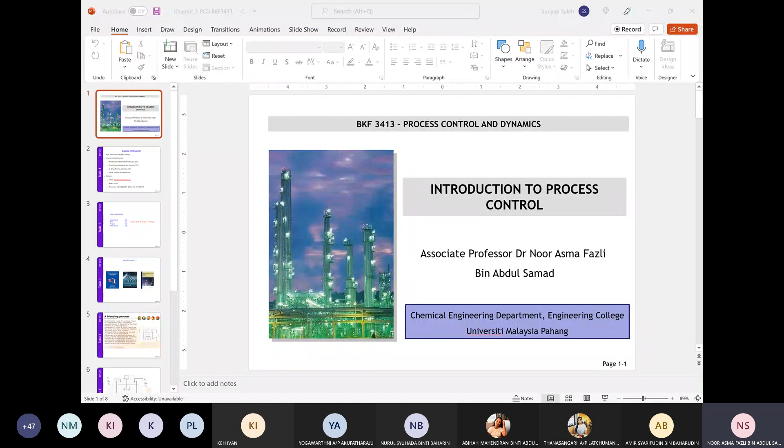My name is Noor Asma Fazli bin Abdul Samad, and I will serve as your instructor for this class. A little bit of academic qualification from me: I got my degree and master's in chemical engineering from UTM, Johor, and then I pursued my study in the process modeling and control area at Denmark Technical University, DTU. Lastly, I also extended my study in the postdoctoral area around properties prediction.

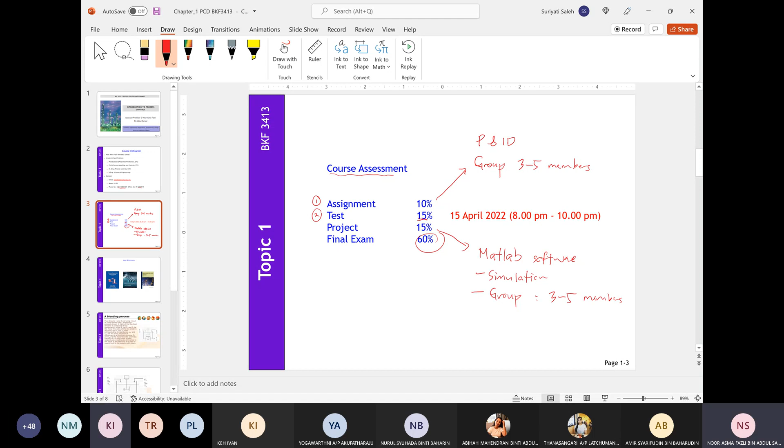Okay, if there is no question, then we go for the textbook, the main reference that will be used for this subject. You are free to use any kind of textbook, however the main thing that we will refer to is based on this textbook, which is Process Dynamics and Control. There are so many versions - the first one is the second edition textbook, which is one of the textbooks you can use. This one, normally for the second edition, is a complete version. That means when we say complete, it covers everything - all of the content that is covered in this subject will be available in this textbook.

And the good thing about the second edition is it's supported with explanation. That means any kind of exercise, any kind of material is supported with theoretical discussion. So this second edition, for me, is a good textbook for all of you.

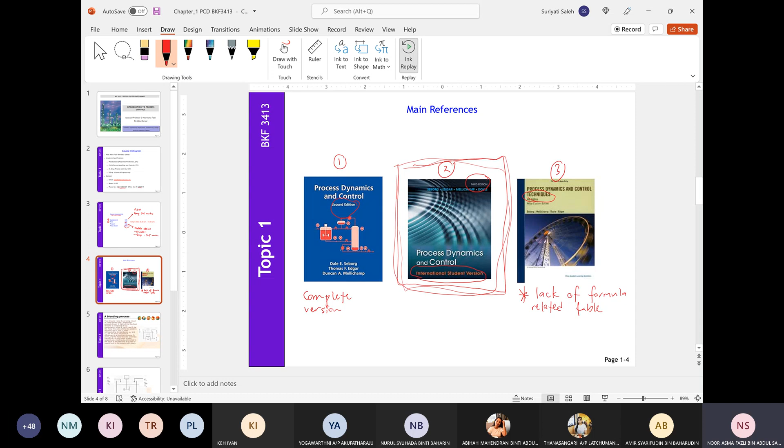Okay. So before I begin our class, let's hear some opinions from all of you regarding this subject. Any opinion or input from any of you regarding this subject? What do you hear from your seniors, or what is your past experience about this subject?

Doctor, yes, may I ask a question? Is the textbook compulsory for us to buy?

Okay, since this semester we are still conducting online mode, you don't need to buy it. As long as you have the soft copy, that is enough. It's compulsory to have the soft copy. If you have the hard copy textbook, it will be easier for you to study, but it's not compulsory to buy the textbook.

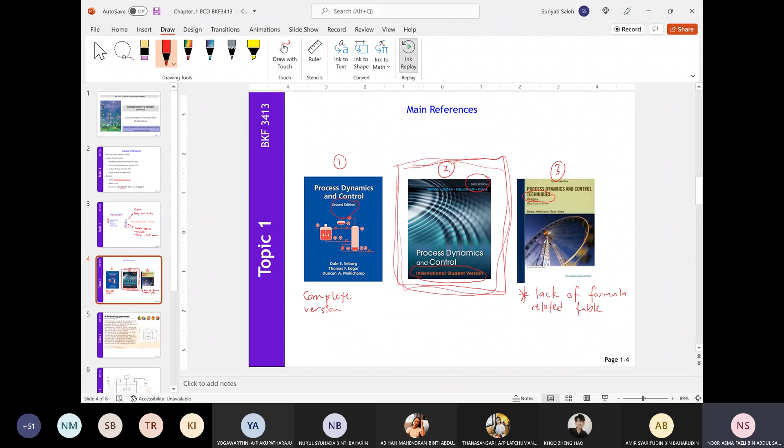Okay, let's take a look at the topic of introduction. This is the textbook, second edition. Now let's go to the introduction. We go straight to the case study, so we won't dwell on the introduction too much. Let's see - in this case, a blending process.

So here you have the term blending. What is meant by blending? Blending is what we call mixing, meaning you have two components you want to mix into a single component, or you want to achieve a uniform composition.

For this part, two streams, 1 and 2. So you have two streams coming into the system. Stream 1 and 2 are being mixed in a well-stirred tank, producing a product stream 3. So this is your stream number 1, stream number 2. You add them together and then you have the stirrer. So this is your stirrer.

The function of the stirrer in this case is to ensure good mixing of the composition, meaning that when you mix it, you will achieve a uniform composition. Once the stirring process is complete and you achieve uniformity, the product exits the process at stream number 3. So based on this, you have 2 inlets and 1 outlet.

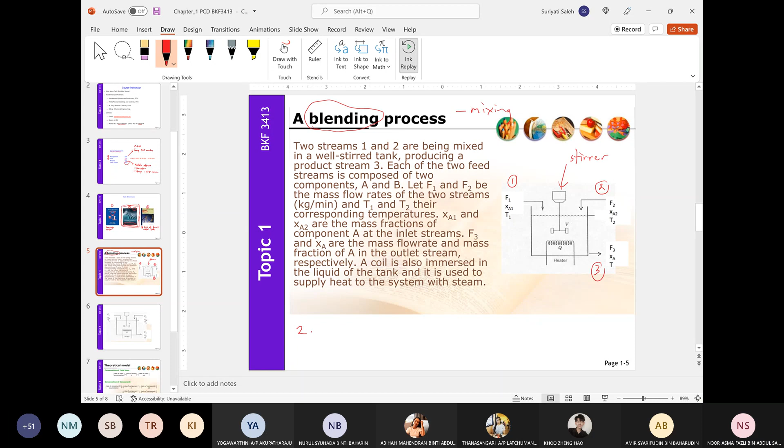Okay, each of the 2 feed streams is composed of 2 components, A and B. So in stream number 1, you have A and B, and stream number 2 also has A and B.

Let F1 and F2 be the mass flow rates, in kilograms per minute - the unit is mass over time - and T1 and T2 their corresponding temperatures. Since you want to mix it, this needs to involve the composition. So XA1 and XA2 are the mass fractions of component A at the inlet streams, and F3 and XA are the mass flow rate and mass fraction of A in the outlet stream.

So here is the elaboration of the variables. First we have the unit operation, which in this case is the blending tank, stirred tank, or mixing tank. You put 2 flow rates coming into the system, mix it, and then achieve the composition.

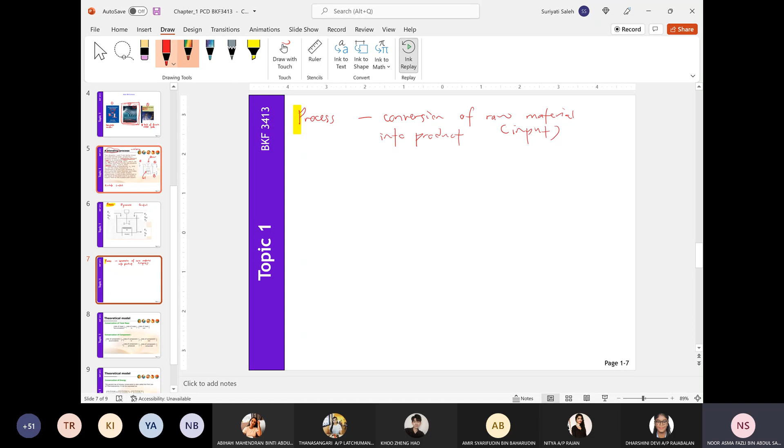And then you want to mix the solution. And by mixing the solution, you will get the desired product in the form of the composition. So that is what is meant by the process. So for this part, the process understanding is very important. Why is it important? Because it decides what variables will be involved.

So let's take a look. Here you have stream number 1, stream number 2, and stream number 3. We have F1, which stands for the mass flow rate, and F2 is also the mass flow rate. You have the mass flow rate coming into the system, entering the system. So when you have the mass coming into the system, it will change your volume inside the tank. The V here stands for the volume.

Just to imagine, let's say we have a mass flow rate here of 5 kilograms per minute, the second stream 3 kilograms per minute, and F3, let's say 2 kilograms per minute. You have 5 and 3 as the inlet flow rates, and you have 2. What happened to the volume? Increasing. Why is it increasing? Because the input is larger than the output.

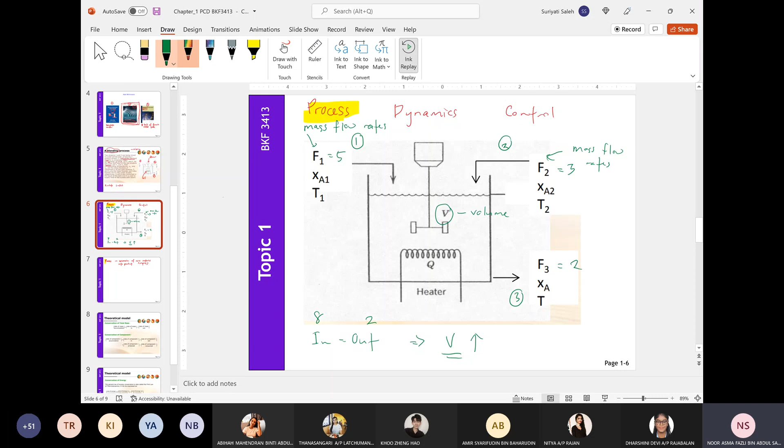How much does it increase? This will be observed through the mathematical model. So you need the mathematical equation in order to observe how the behavior of the volume changes. What I want to emphasize is that by evaluating the impact of the variable, we need to come up with the relevant mathematical model, which will give us how the behavior looks. So we can say the volume is increased, but how much it is increased can be determined through the mathematical model.

The same goes with the composition here. You have XA1, you have XA2, and in the end you have XA. Let's say, just a random value for you to imagine, XA1 here is 0.5 and XA2 is 0.9. So when we mix it, you will achieve a new composition. That means there will be a change in your composition value. So how is it changed?

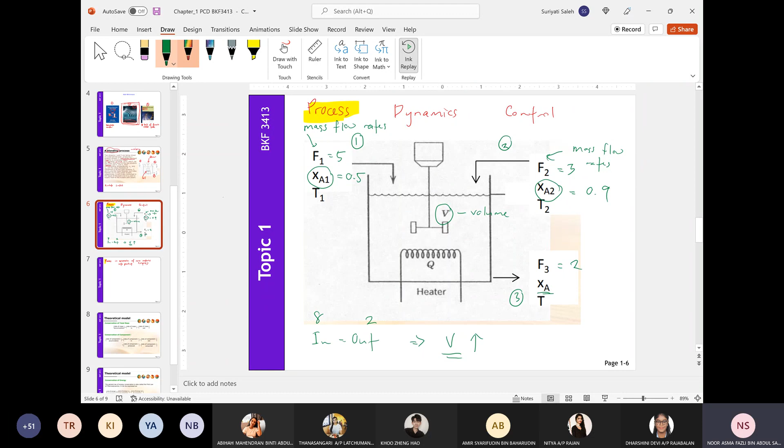It will depend, or it can be predicted using a mathematical model. The same goes with the temperature. You have the T1, you have the T2, you have the T, and then you have the Q here. Let's say here T1 at ambient temperature 25 degrees C, T2 also 25 degrees C. Then you put heat. So this heater, maybe you put it 1000 kilojoule per hour or per minute.

So you heat it, then of course the temperature will be increased from ambient to the higher temperature. But what is the value of the higher temperature? How can we determine it? By using a mathematical model. So for this case, we can see that the volume, the composition, the temperature, these variables will be changed. How to observe the change of these variables? Then you need the relevant mathematical model.

And how the mathematical model can be generated or derived is by looking at the conservation of mass and energy principle. So this is the extension from what has been learned in material and energy balance. In material and energy balance, you don't consider the rate of accumulation. For example, in the conservation of total mass, the general equation is rate of mass accumulation, how much your mass is accumulating in the system, equal to rate of mass in minus rate of mass out.

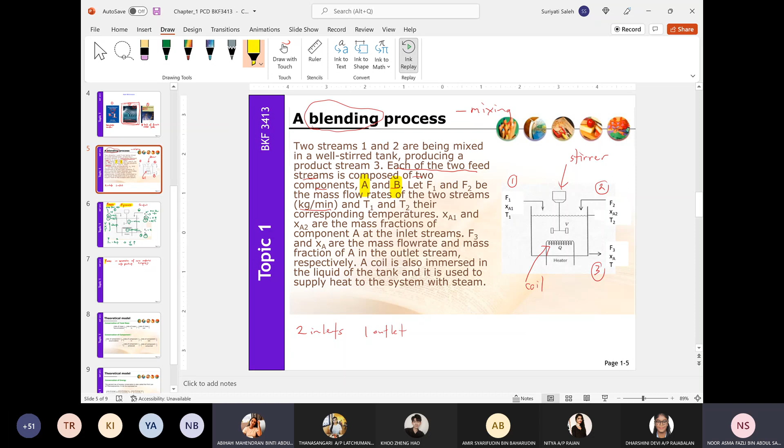So in this case, we will consider the rate of accumulation, where this one is equal to the rate of mass in minus the rate of mass out. And since you have the composition change, the mass fraction will be changed, then we also need to consider the conservation of component. For example, in the given case study, you have two components, A and B. That means we will derive the equation to represent the composition of A and the composition of B. Once we obtain the model, we can observe the behavior of change for components A and B.

So for the conservation of the component, normally we will start with the rate of component accumulation, the first term. And this accounts for the rate of component in minus rate of component out: how much of this component is entering the system minus how much is exiting the system. And some of the terms that can be included are the rate of component i produced and how much has been consumed. So in this case, you can see there are 4 different items on the right hand side: component i in, component i out, component i produced, and component i consumed.

So the selection of the terms that need to be used depends on whether your process involves a reaction or not. For this part, the blending system, you just mix the composition into one. So when you mix it, it does not involve any reaction.

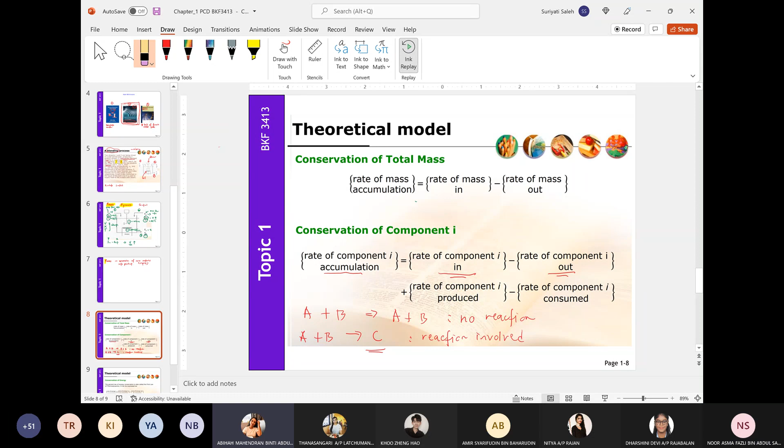And lastly, what we want to cover is the conservation of energy, where the energy is normally referring to the temperature. So the energy in this case we assume is based on the enthalpy. Normally for the energy conservation, it is developed on the principle of the first law of thermodynamics, where energy cannot be created, cannot be destroyed. However, it can be transformed from one form to another form.

So how is it transformed? In this case, we accumulate the energy based on its rate, and we account for it based on the rate of energy in by convection, out by convection. So you have the stream coming into the system, the stream exiting the system. This stream coming into the system carries some energy. This energy is brought in by convection, and exits the system also by convection. So this is contributing to the energy change in your system.

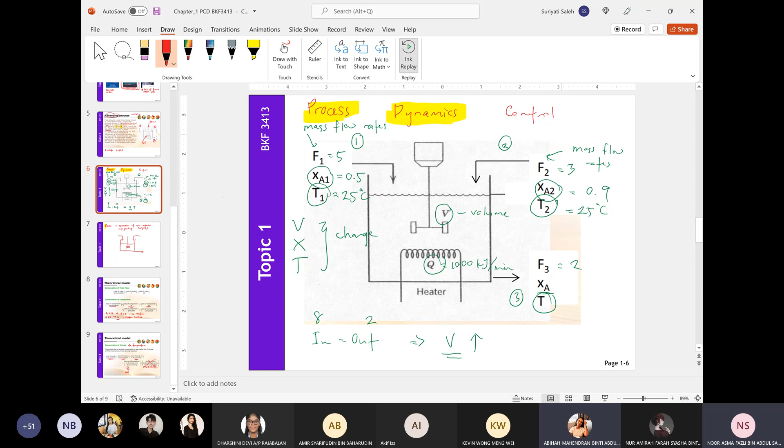Alright. For this part, it's clear. For the case study I give it to you, it's clear. The Q is there, so that means you have the heat addition. You have the coil. In some cases, when you read the question in the test or final examination, it does not mention any coil. It's like this, so no coil involved.

How about the temperature? The temperature normally depends on the value of your inlet. Let's say here you have T1 25 degrees C, T2 also 25 degrees C. Normally in this case we assume the temperature is not going to change, because here we normally neglect the heat of vaporization, the heat of formation and so on. We just assume the temperature comes from the flow rate only.

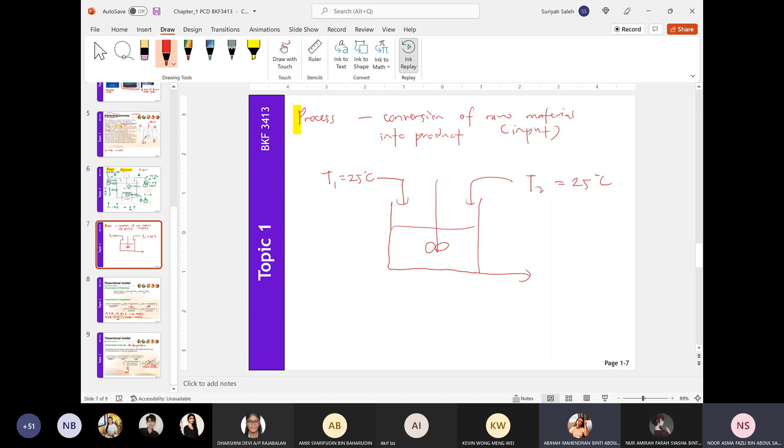So when you have inlet temperature 25 and the second inlet temperature is also 25, then we can assume the system is isothermal. When the system is isothermal, there is no temperature change. You don't need to do the energy balance.

However, let's say you have a second condition. The temperature T1 is 25 degrees C, the temperature T2 is 100 degrees C. So you have two different temperatures coming into the system. Of course, in the end you will have a temperature change. So in this case, you cannot assume it as isothermal.

If we calculate further, 25 degrees C and 100 degrees C, maybe in the end you will get around 50, 60 degrees C. So there will be a temperature change inside the tank, and you require the energy balance for this part. Although it's important to know that in this case you don't have any coil.

In other words, if you don't have the coil, you need to check your inlet temperature. Is it constant or not? If the inlet temperatures have the same value, you don't need the energy balance; you can assume it as isothermal. If the inlet temperatures are like this, 25 degrees C and 100 degrees C, then of course you will have a temperature change inside the tank. So that is the answer for your question.

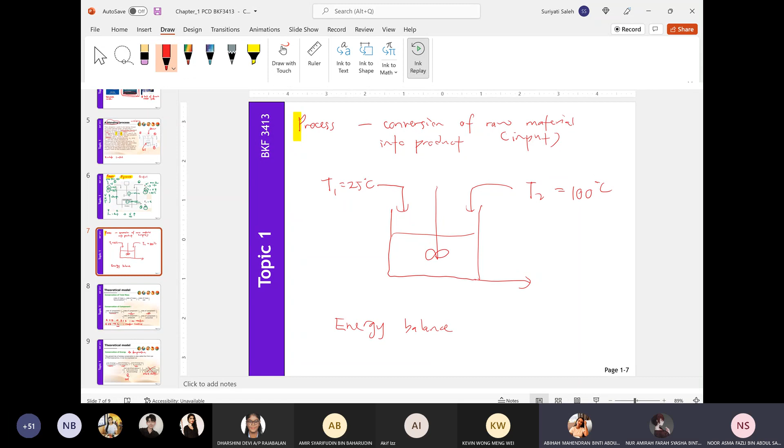The Q is coming from the coil.

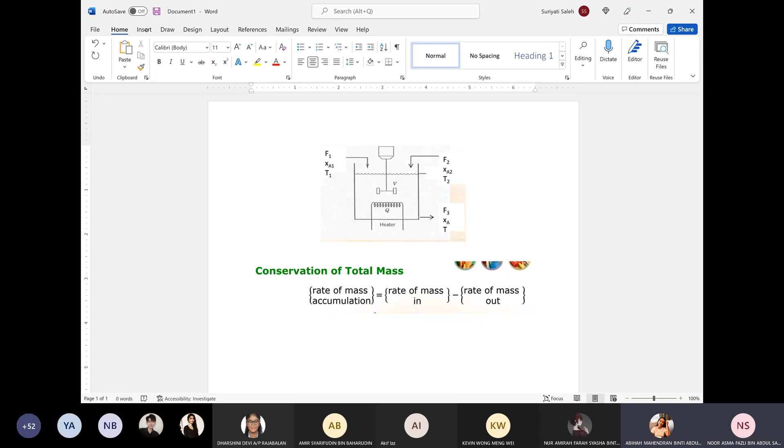Okay, let's continue with the derivation of mass principle. We will use the given case study. In this case, we have the blending system where you have two inlets coming into the system. The F is your mass flow rate, where the unit given is kilogram per minute. And the X is the mass fraction. Since you have the mass in kilograms, the mass fraction should be kilogram over kilogram. This is the standard unit.

You need to ensure you have consistent units. If the mass flow rate is in kilograms, the mass fraction needs to be kilogram over kilogram. If you have gram over gram, you need to convert it into kilogram, because the consistency of the unit is very important. Based on our observation of the process, when you have two flow rates coming into the system and one exiting, the volume inside will change, either increased or decreased, depending on the value of your mass flow rate.

Now we want to derive the relevant mathematical equation to represent the volume inside the tank. Based on the conservation of total mass, the first term is the rate of mass accumulation, dm/dt, where d is the derivative, the differential equation to account for how the mass changes against time. The m stands for the mass, in kilograms, and t is your time, in this case in minutes. So dm/dt represents the rate of mass accumulation.

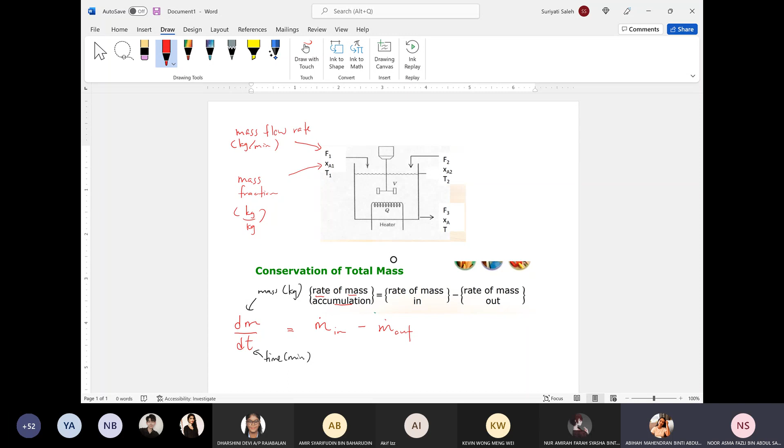And then it equals the rate of mass in, normally with the symbol M dot in, minus M dot out. M dot in is the rate of mass in, M dot out is the rate of mass out. This is the standard symbol used to represent the rate of mass in minus the rate of mass out.

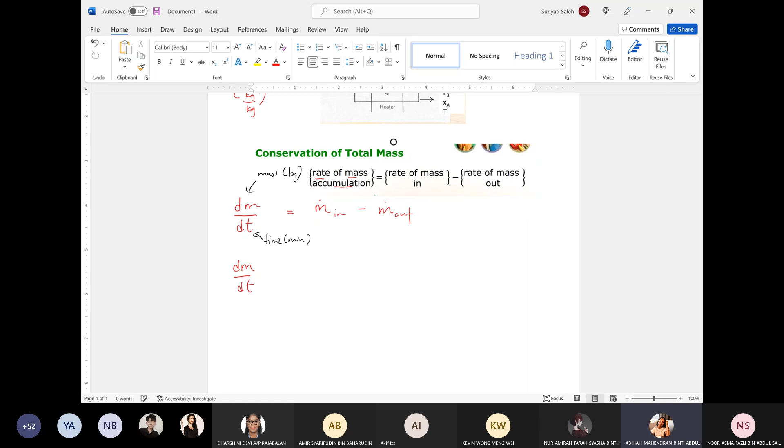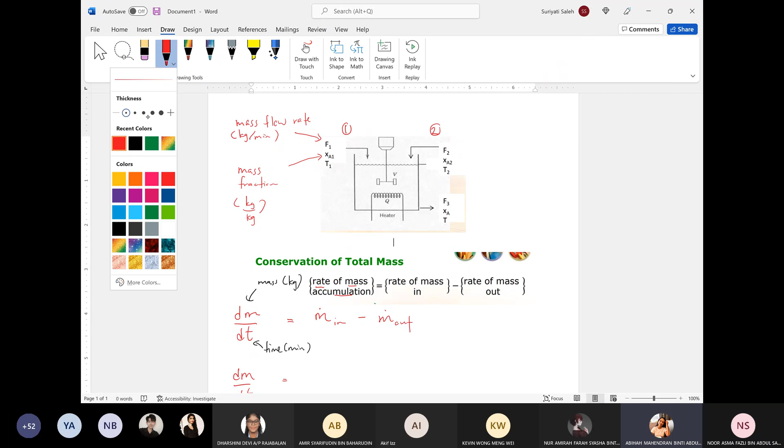So based on this, we know that dm/dt equals m in, the rate of mass coming in from stream number 1 and stream number 2. This is the mass coming into the system. Since we need to ensure the unit is consistent on the left and the right hand side, the rate of mass out must have the unit of kilogram per minute. So when you have kilogram per minute on the right hand side of the equation, it's also consistent with the unit on the left hand side of your equation.

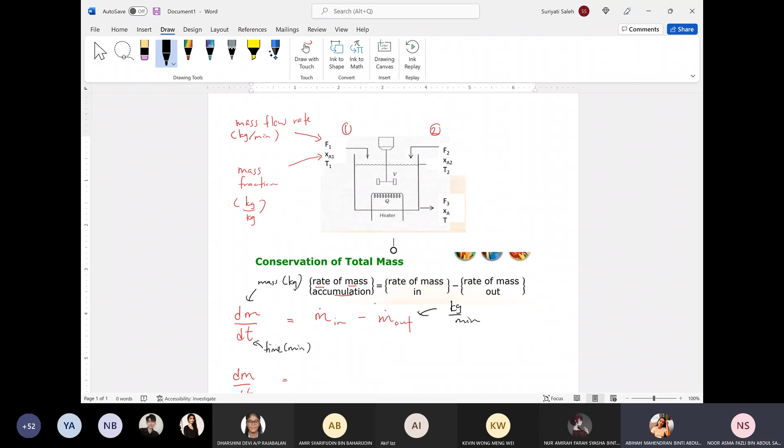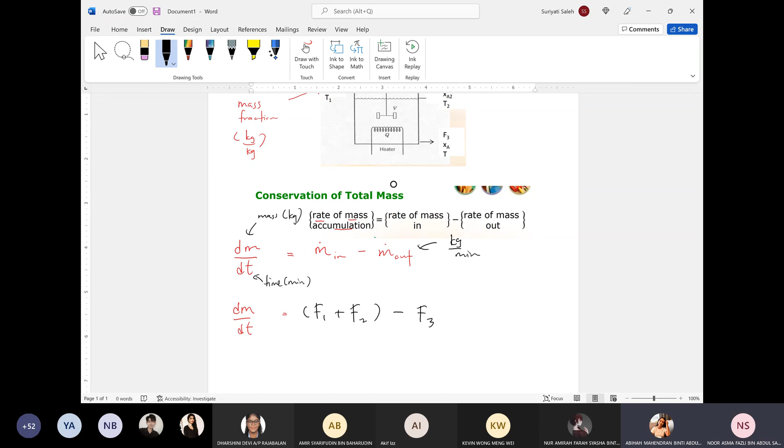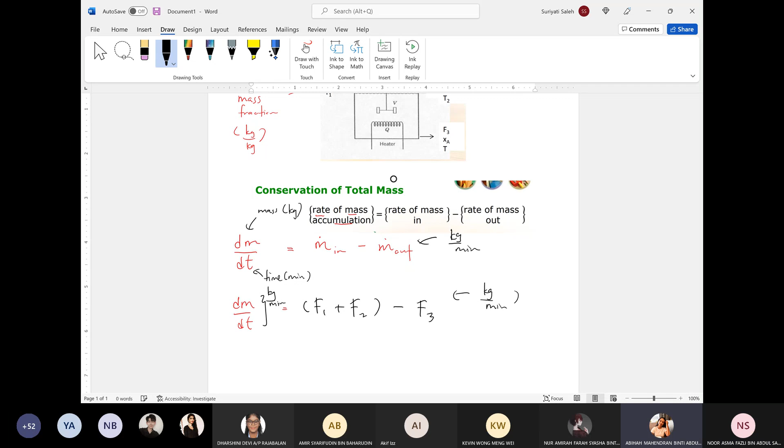So based on this, you have two flow rates coming into the system. So here you need to add F1 plus F2. This F1 plus F2 represents the rate of mass coming into the system. And then you have minus F3. F3 is the rate of mass exiting the system. So that's how you can adjust accordingly. When we check again, dm/dt has kilogram per minute, and the right hand side is also kilogram per minute. Then it is consistent. So this represents your conservation of total mass.

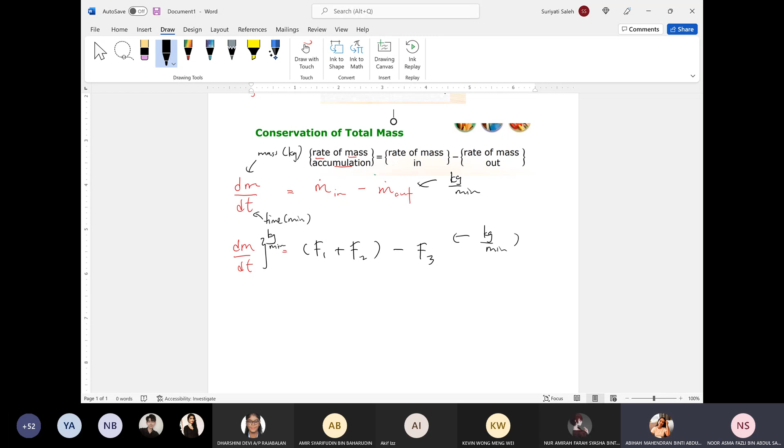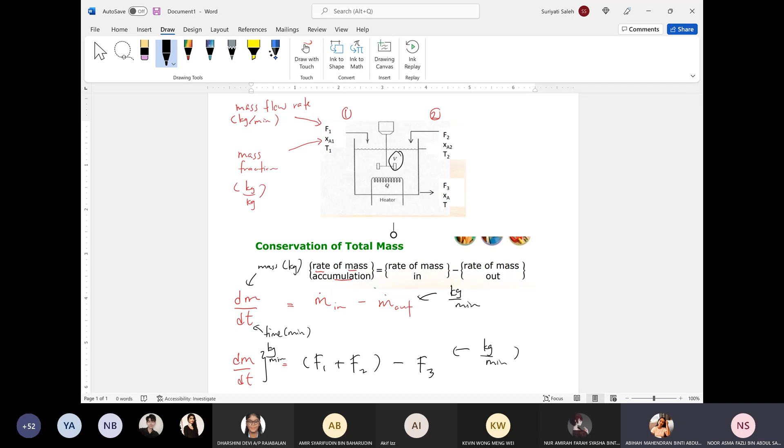The problem here is your left hand side, dm/dt, change of mass against time. If you take a look at your case study, the variable used is volume. So we need to identify the relationship between the volume and the mass. Normally we can use density to relate mass and volume, where mass m equals density multiplied by volume, where mass is kilogram, volume is meter cube, and density is kilogram per meter cube. You cancel meter cube, you get kilogram. So this relationship can be used to relate mass and volume.

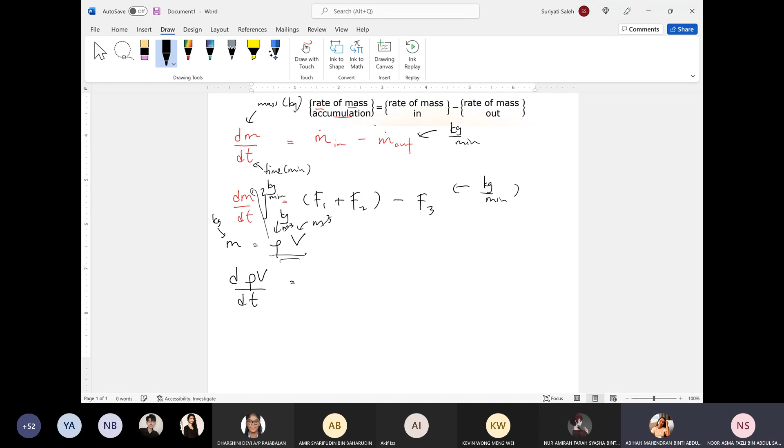What we need to do is put this relationship inside the equation. So that becomes d(rho V)/dt equal to F1 plus F2 minus F3. What happens next is to expand the equation, where d(rho V)/dt can be expanded to become rho dV/dt plus V d rho/dt, equal to F1 plus F2 minus F3. So based on the expansion of density and volume, you get two additional terms. The first one is rho dV/dt, and the second one is V d rho/dt.

So we have the density relationship. The first term, dV/dt, is volume change against time, reflecting how the volume inside the tank is changing. The second term is density against time. Normally the density is not going to change against time. It's fixed. The simple way is to imagine the density of water. Today, the density of water is 1000 kilogram per meter cube. What is tomorrow's density of water?

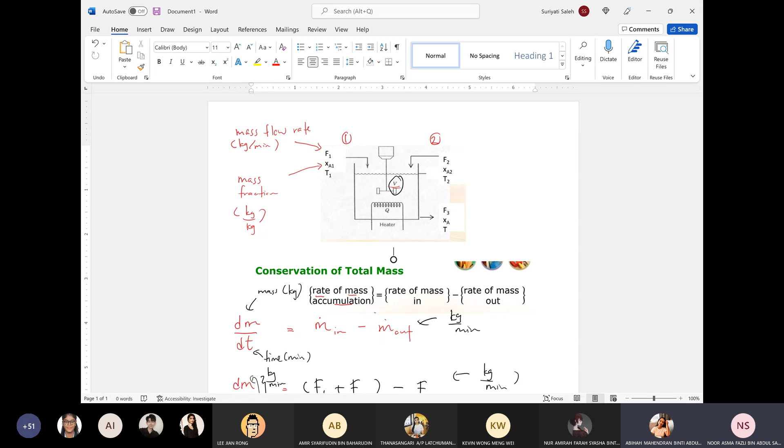So we complete the conservation of total mass, where your equation reduces to rho dV/dt equal to F1 plus F2 minus F3. This is the final overall mass balance for your given system, where now you already use the volume, the given variable for this case study. Once we complete the conservation of mass, we can focus on the conservation of component balance. This is your equation, conservation of component.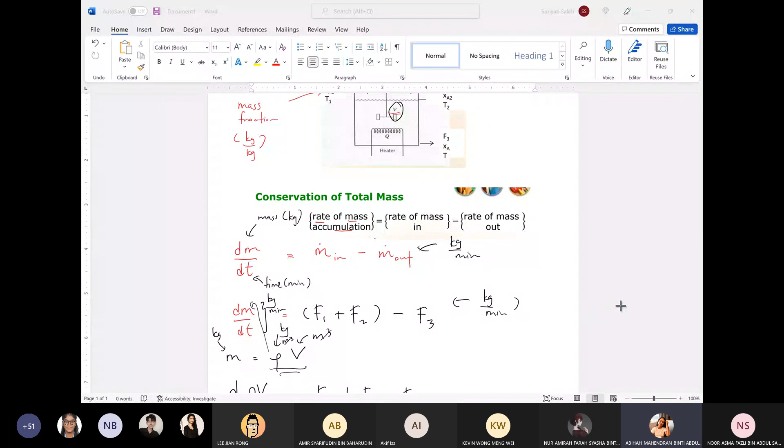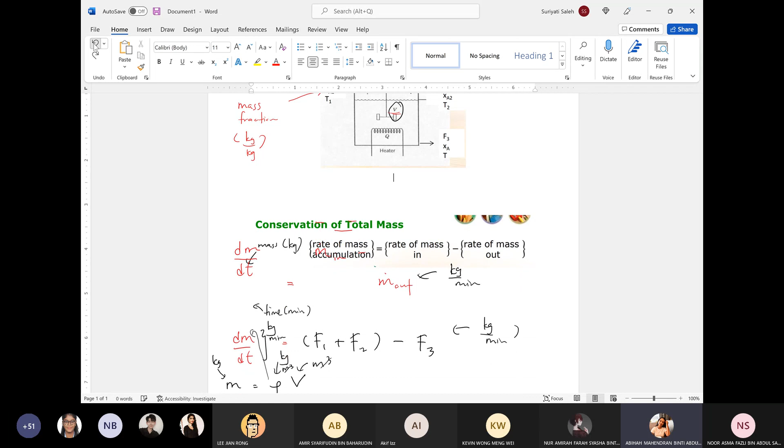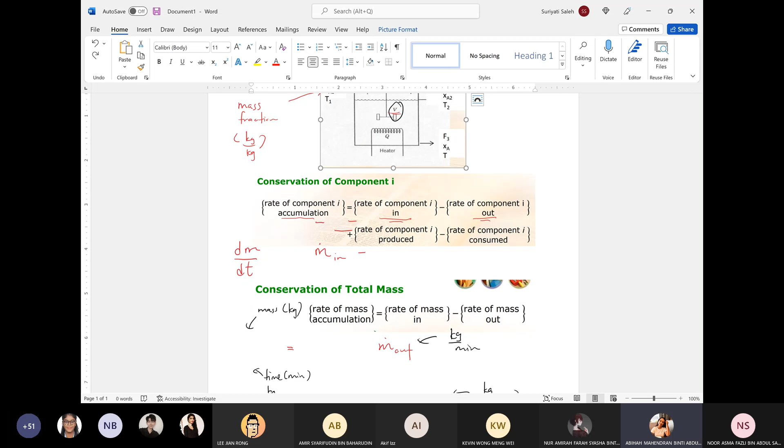Now we concentrate on this part. Doctor, your voice is lagging. Oh, my voice is lagging. Oh, wait a moment. Okay. Can you hear me? Yes, Doctor. Alright.

So in the previous case we developed the conservation of total mass. The second part is the conservation of component, because we deal with two components in this case. For this part, we concentrate on XA. As given in the problem, you have XA1, XA2, and XA here. We want to develop the component balance of A. We employ the conservation of component principle, where you have the rate of component i accumulation. Component i refers to component A.

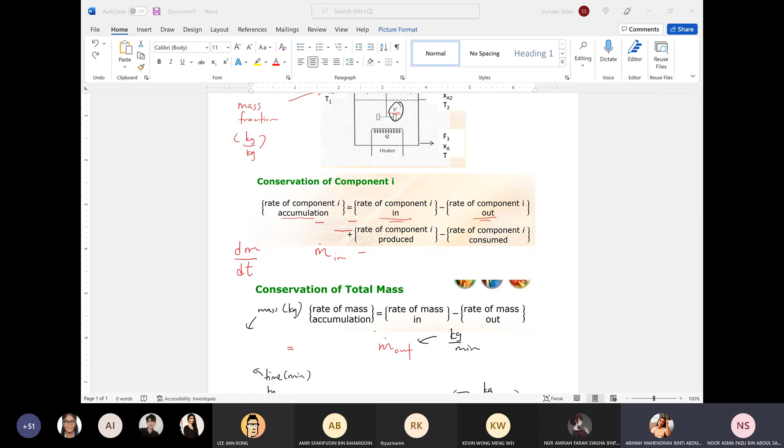All right, so for this part, we focus on the component A derivation, where we use the conservation of component I principle. The first part is the rate of component I accumulation. So for this, we focus on component A, where the rate of component I accumulation is represented by dMA over dt, where the MA here represents the mass of A.

Before this is just total mass, so for this part we specifically focus on the mass A. This means the unit for the mass of A must be kilogram A, and the dt is the time, which in this case refers to the minute.

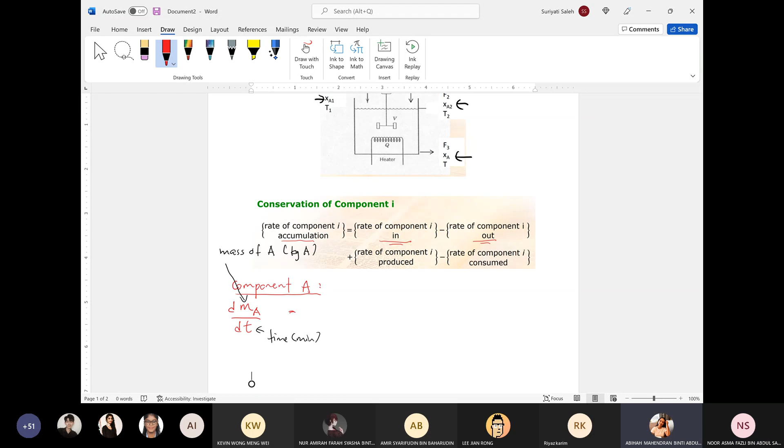So you have the dMA over dt equal to the rate of component I in. Based on your case study, you have flow rate 1 and flow rate 2. So the flow rate 1, you have the XA1. So in this case, we have the M dot A in minus M dot A out. M dot A in means referring to the mass of A coming into the system, minus the rate of mass of A exiting the system.

Since this case is just blending, you mix A and B, you don't have any reaction. So you don't have the rate of component I produced, you don't have the rate of component I consumed. So we just use the rate of component I in minus the rate of component I out.

So for this part, we try to relate it. You have the dMA over dt. How to get the MA with the X? We know that MA equal to the XA multiply with the M. If we take a look, the MA here is kilogram A. XA is mass fraction, kilogram A over kilogram, where the kilogram only refers to kilogram total, A plus B. And the M is your mass, kilogram.

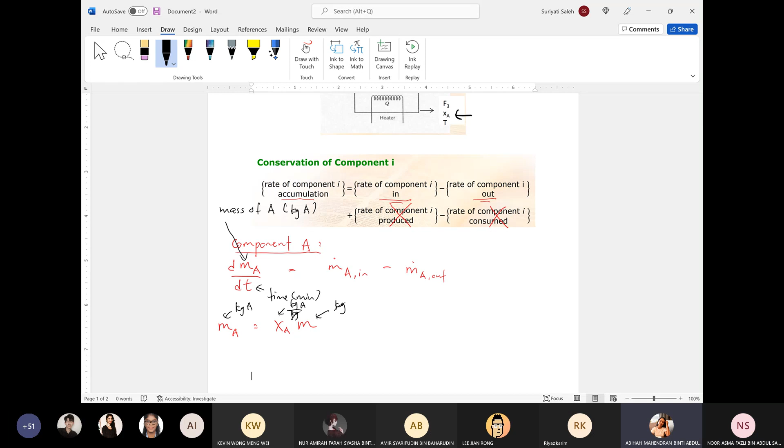So when we try to multiply it, you get the kilogram A, which is consistent unit for the left-hand side. So for this part, we can substitute into the given equation to become dXAM over dt.

So you have dXAM over dt equal to M dot A in. M dot A in is the mass flow rate coming into the system, mass flow rate carrying the component A. So you need to involve F1, because it's the mass flow rate. And then in the mass flow rate, you have the composition, so you have the XA1.

So if we take a look, F1 is kilogram per minute, XA1 is kilogram A over kilogram total. So when you try to multiply it, you get kilogram A per minute, which is consistent with the left-hand side. So this is the term to represent rate of component A coming into the system in flow rate number 1. Since you have the second flow rate carrying component A, then we just add plus F2 XA2.

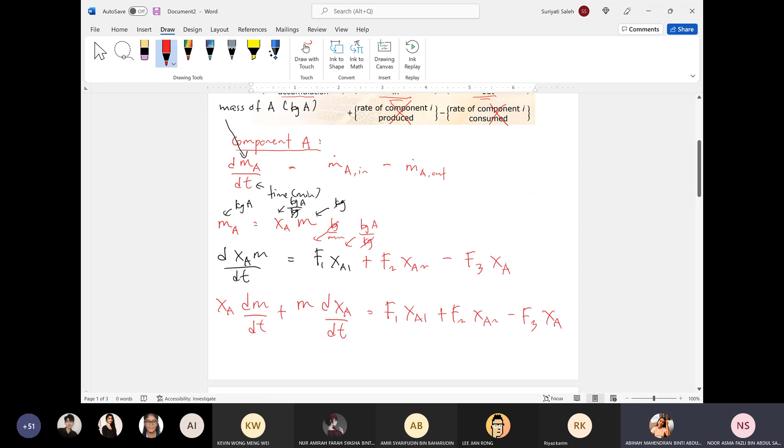So in this case, XA is used to represent the exit composition. So I just use the XA. So you have XA dm over dt plus m dXA over dt equal to F1 XA1 plus F2 XA2 minus F3 XA.

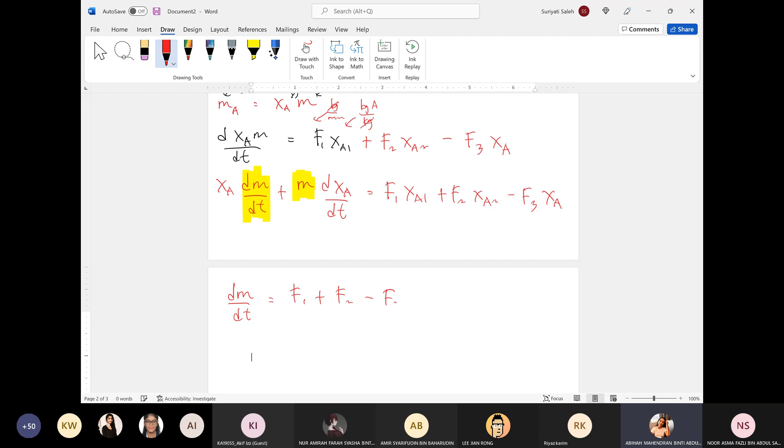So what to do next? If you recall, in this case, we have the dm over dt, and then you have the m. In the overall mass balance, we know that dm over dt equals F1 plus F2 minus F3. This is coming from the overall mass balance, the one that we developed before. And then we also know that M equals rho V, the relationship between the mass and the volume.

So what to do next is to substitute the term inside the equation, where in this case we have the XA, F1 plus F2 minus F3. So we have the dm dt, we substitute into this given equation, plus m, which is rho, the density, multiplied with the volume, dXA over dt, equal to F1 XA1 plus F2 XA2 minus F3 XA.

So the next thing is to expand the given term. You get XA F1 plus XA F2 minus XA F3 plus rho V dXA over dt equal to F1 XA1 plus F2 XA2 minus F3 XA.

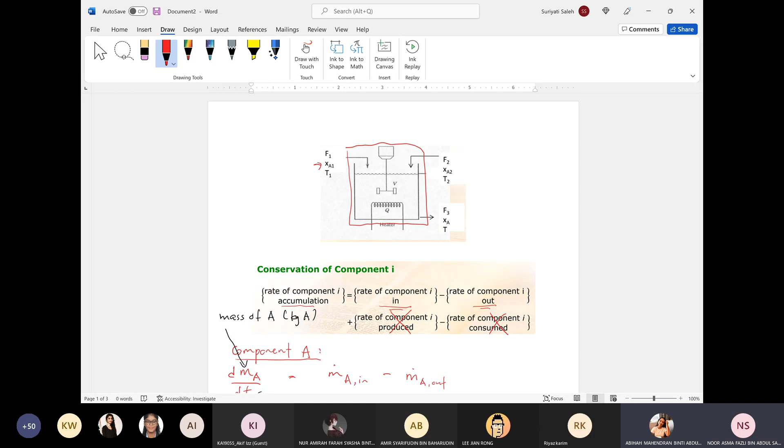So for this part, if you take a look, the rate of accumulation is coming from the inside, from this boundary. So it's quite clear: XA1 is supposed to be the flow rate in, XA2 flow rate number 2, and XA here referring to the exit flow rate. However, normally the XA in this case is located inside the liquid, because you want to mix XA1, XA2. It is being mixed inside the tank. So during the derivation, we start the derivation based on this boundary, so it represents the XA. So for this part, this XA in the end will exit the system through the flow rate number 3, the outlet flow rate.

So we assume whatever composition inside is achieved under uniform composition. That's why you have a stirrer. When you have a stirrer, we assume it has uniform composition throughout the liquid and it will exit the system. So based on our derivation, the XA represents the composition inside the tank, and we also assume the composition exiting the system is equivalent to the composition inside the tank. So the answer is yes.

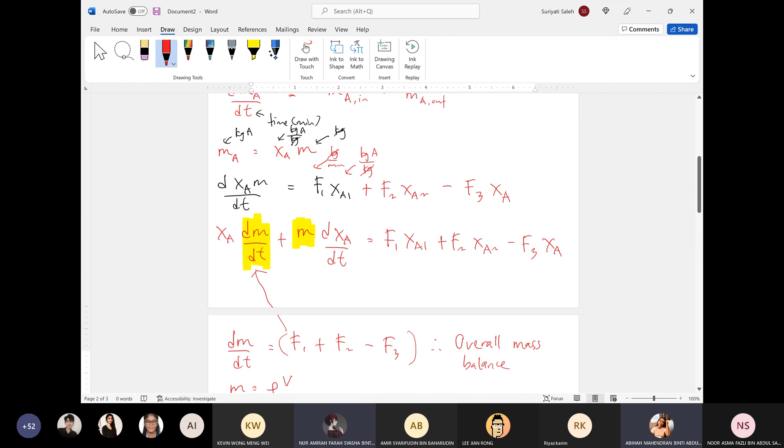You mean that you have one input and then two outputs, like this? Dia macam yang distillation column, ada distillate dengan bottom.

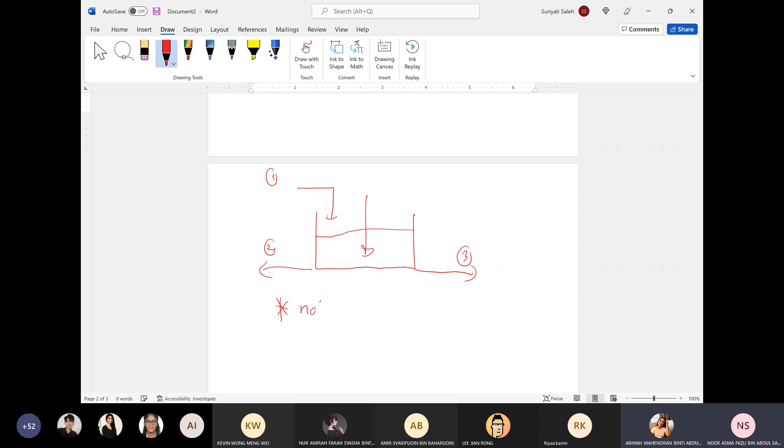Alright, thank you for the question. In this case, normally we will do it based on the unit operation. There are some scenarios, for example like this - this is what we call a tank, only the simple tank. You have one coming into the system, but you have two outlets. So for this part, we don't call it a mixing tank. This is not a mixing tank. This sometimes mimics the storage tank, or splitting tank.

So mixing means you mix together two different flow rates. For this part, one stream comes into the system and then you split into two - you store it for a while, then you split it. So in this case, you don't involve any component balance, it just involves the overall mass balance. That is the first thing about the tank.

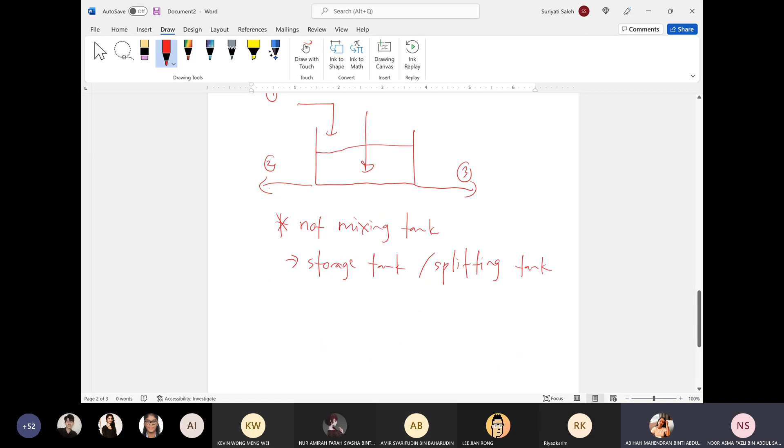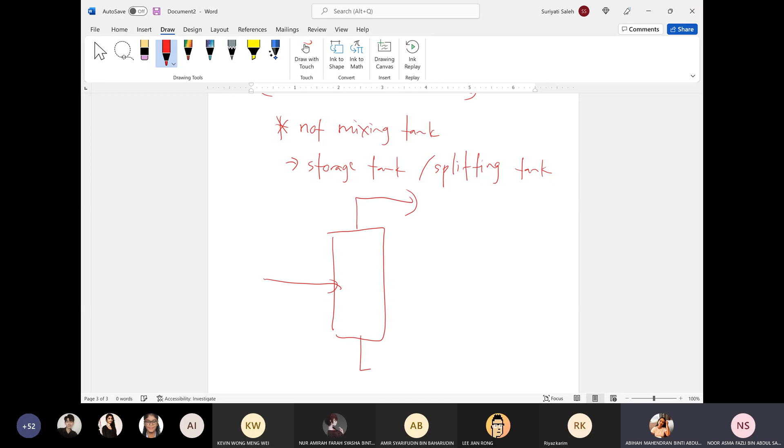And in some cases, if you have separation, you have the distillation column - one inlet, two outlets, this one top, this one bottom. So this is a different phenomena because you're separating things based on, let's say, for distillation column, to separate components according to the boiling point. This involves the liquid and vapor phase, so the thermodynamics is different. So when your thermodynamic is different, the derivation will also become different. Normally we don't do the derivation of distillation column in this subject, because it is complicated. We just focus on the tank only.

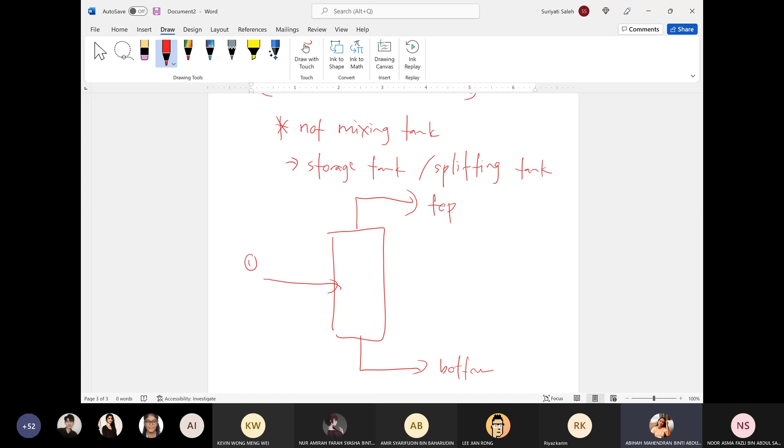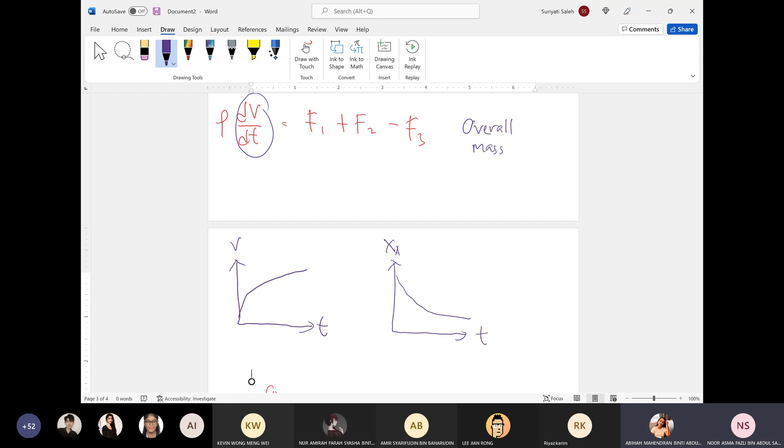First, we need to obtain the model. The same goes with the composition. So in the end, the outcome is we want to observe the behavior against time - this is what we call dynamic. So let's say for composition A, the profile looks like this. How do we get this profile? We will solve the given model. So this is the idea why we need to derive the mathematical model for this case study. So it's not that we will derive it without purpose - there is a purpose for the derivation of both balances.

So right now we already developed two balances, the component A and the overall mass. Since the question mentioned there are two components, component A, component B - based on the question given for this case study, it is stated that two components are involved. For inlet stream, you have component A and B. For outlet stream, also you have component A and B. So now we already completed component A - how about component B?

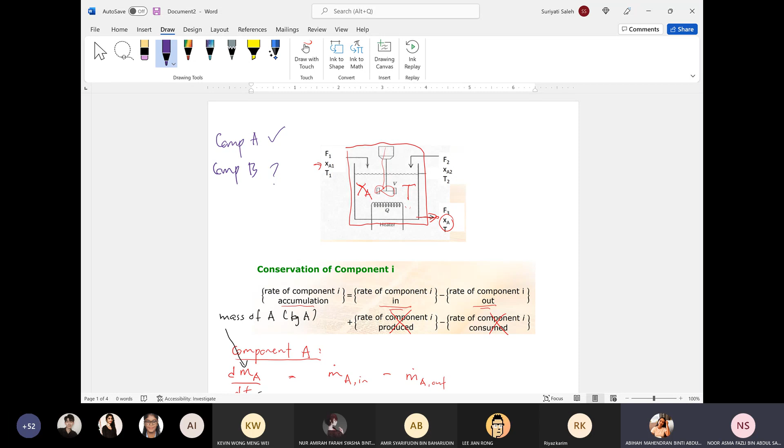In this case, there are two answers that are acceptable. The first one, you can derive it - component B balance. How do you derive it? The same way like you did for component A. The same thing.

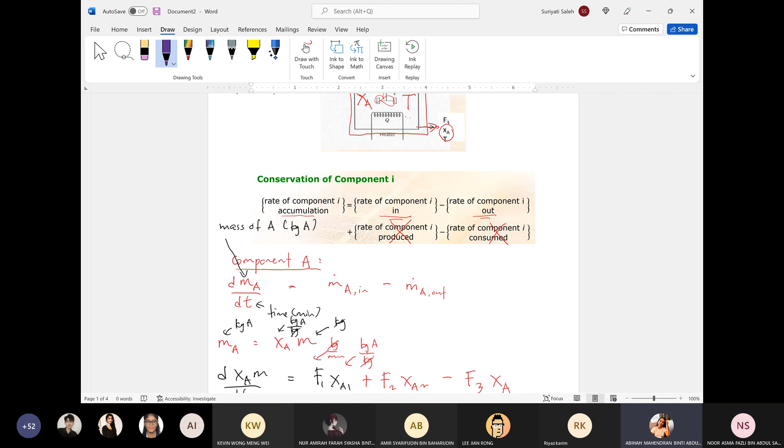So in the end, I think you will get the same answer like what you have for the component A balance. Only the difference is in terms of the labeling. Since we assume all of the component B is available in each stream, you may get rho V dxB/dt = F1(xB1 - xB) + F2(xB2 - xB). So you will get the same arrangement like you have for the component A. Only the difference is you replace xA with xB. That's how you can derive the component B balance.

Or that is the first solution. You do the hard way. You derive from the beginning, from scratch. Or sometimes you don't need to derive it. Why don't you need to derive the component B? Any opinion? 1 minus xA equal to xB. Okay, thank you very much.

You need to understand the concept of the mass fraction. So normally this is the mass fraction. For the mass fraction, you have the concept of xA plus xB equal to 1, since you only have two components A and B. So once you obtain the xA, then you can obtain the xB easily, 1 minus xA. So you don't need to derive it. So these are the two ways that you can adopt for obtaining the component A and B behavior. So this is the importance of process understanding, where the concept must be established.